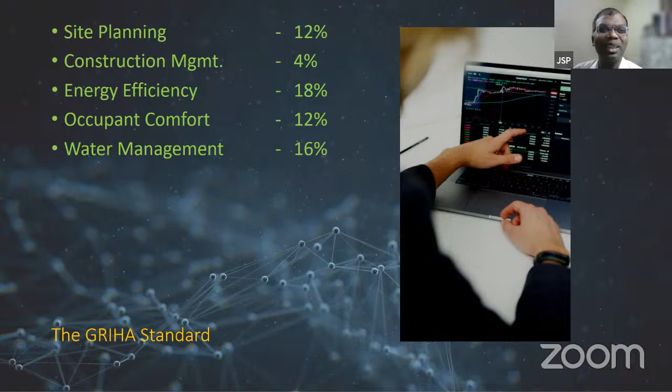If you are able to provide comfort to the end users, whoever is going to operate the building, and the stage people, it is going to be great. Occupant comfort has 12% weightage, and water management has 16%. Why we specifically want to talk about water and energy is because these are two things which will be continuously used in any building - for cleaning, drinking, sanitation and other human needs.

Water is very important. Energy is very important. Suppose we are able to handle water carefully, many of our problems are solved. So this is having a lot of marks. Then there is solid waste management, which has 6% weightage. The other important thing is sustainable building materials.

If you look at point number 2, construction management and sustainable building - the civil engineers have the control. If you are very good at these two, 16% of the marks are got. Energy efficiency is something where the problem in India is, when you look at an LED tube light, it is much costlier than the ordinary mercury tube, so we always go for the cheaper one initially.

If you look at the bulb - the Edison bulb or incandescent lamp - it is hardly 10 rupees, much cheaper than any other system. However, the energy efficiency is that much lower, but still people tend to move for the cheaper option because they see the initial cost. However, the true cost of the building is not at the initial stage, it is in the operation stage. Construction stage is 2 or 3 years maybe.

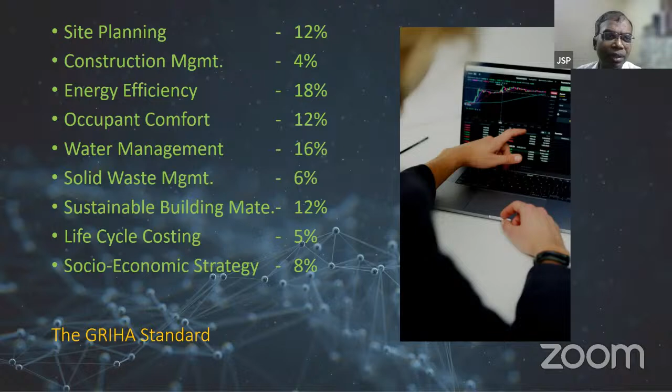One more thing is the social economic strategy being followed in the building. For example, labor force facilities - how are we making them feel good? What makes them work safely? What makes them work in comfort? For example, providing toilets, providing water - all of these are there in BOCW also.

So this is one of the ways by which students usually pass exams, and we always tell our students if you do this you'll at least pass the exam. If you want to get good grades, you study this extra. That's how we are trying to structure this.

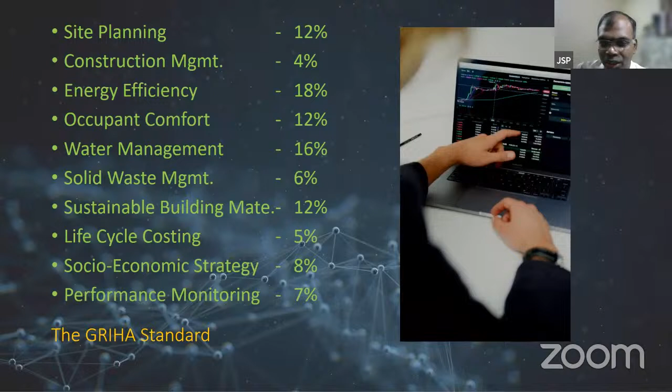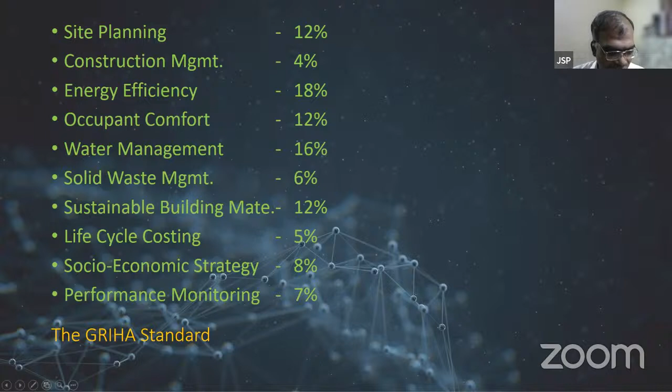I want to highlight that as civil engineers we have a very large role. About 25% of the aspects of sustainability are directly in the hands of civil engineers. I can go on about other things also, and this other 22% we talk about, water management and solid waste management, is also largely under the hands of civil engineers. So we need to look at this in depth: energy and water.

Moving on, the HVAC, heating, ventilation and air conditioning principles, is another very important thing. Whether HVAC is really required is a question we can ask ourselves. Suppose we can eliminate it, like ventilation involving fans.

For example, in my house, which is a rented house, I don't believe in investing too much in any house we go to. However, in the rooms we have more appliances and motors running, in bedrooms, because we spend a full 8 hours at night there, while the rest of the day most of the time we are not in the house. So I put BLDC fans in the bedrooms alone. Like this, even with a bit of selfish interest in cutting the bill, I want all of us to think on these lines.

When we are confident and we can tell that in our house or office we are doing this, we are sure to attract the interest of people buying the product from us. So probably we can say that with green principles, although the initial cost might seem a little high, it is going to be very beneficial for all.

And this is one of the things which all of us are very... I'm sorry, madam. Is there a question?

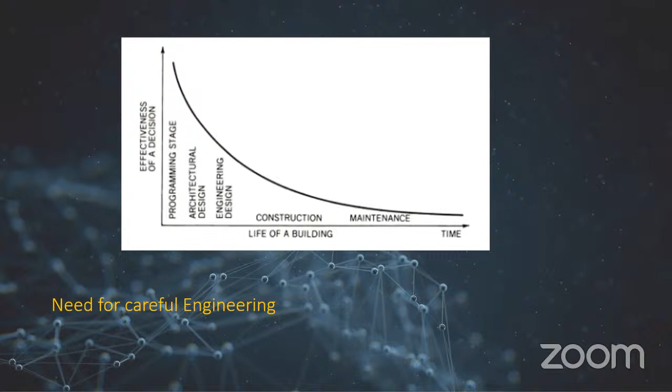Okay, coming back here, we have a graph which all of us are very familiar with. In the initial stages, if you want to make a change, it is very easy to make the change. It may not cost much, or it might cost a lot also, but to make the change is possible.

When the architectural decisions are made, for example the policy decision on how you are going to source electric power for the lifetime of the building, solar power, wind energy, because today windmills are not the traditional windmills alone. People now have different flower shaped vertical windmills which require very little space. In some countries, they use the electric poles to generate wind power. So this is the way technologies keep on evolving.

It's a very dynamic and fast moving world. Like that, we can make changes to any engineering design and other things. We can make a lot of changes. And again, it's an exponential curve.

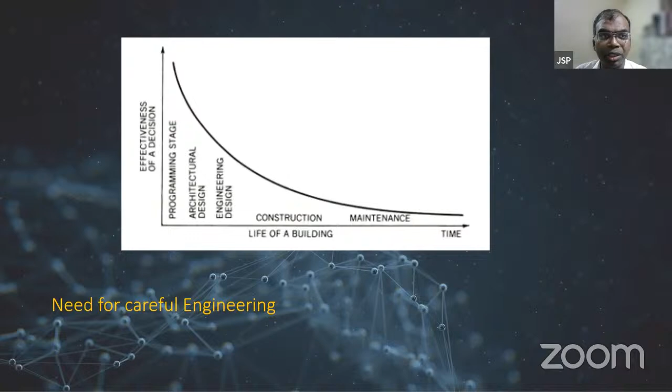So we are using a lot of alternate materials. All of us would have used it in some project or the other: AAC block, shale, the clay, hollow clay blocks, and so on and so forth. A lot of materials have come.

We are trying to reduce the use of carbon. For example, bricks need to be fired, so we try to avoid that, because it automatically gives us carbon credits. But more importantly, these alternate materials have inherent thermal properties. So what we're trying to put across here is, let us engineer our solution such that we can use a combination of materials as well as systems when we talk of energy.

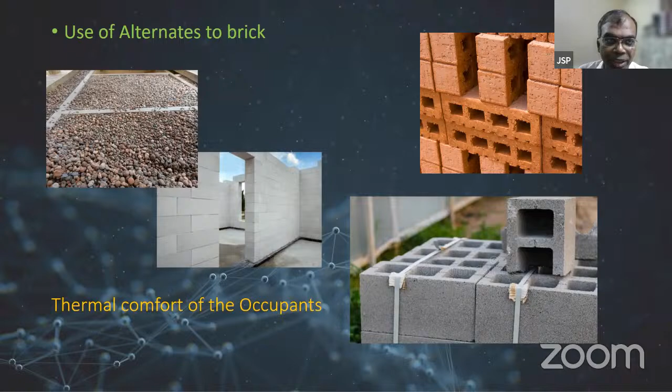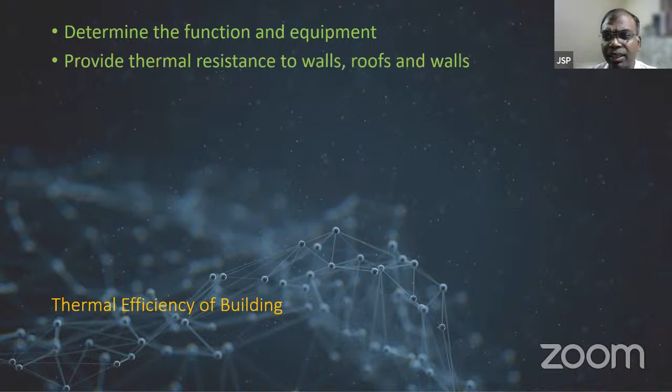Moving on to some general principles, just a reminder of what we can do. Suppose we have a room where a lot of heat is generated, like a switchgear room, what kind of ventilation could be done, and what advancements do we have today which we can probably use. Something we can look at is providing thermal resistance to walls.

Many of us use coatings on the ceiling or some kind of tiles to reduce the incidence of thermal radiation. So it's all engineering decisions which we can take. Also, buildings have certain reflectivity. So when we look at green buildings, they call it urban heat islands, and so many other names are there.

But what can be done to make it to our advantage? And also, it is not only my advantage, how it could affect another person is something which we can look at. And this is something probably a little personal.

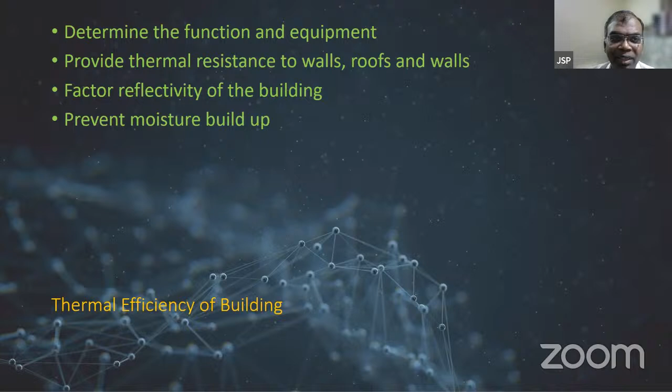Many times moisture buildup causes more damage. Sir was saying in the beginning, we want to see our buildings go on till our grandchild or any other person, and half of the problem is because of moisture movement. I'm not going to dwell too much on this.

Let us try to see, suppose we can weather seal operable windows, that is windows that open and close. If we are able to make it weather tight—especially from my experience in material handling systems, most of these areas are in very dusty areas—some of the windows are such that we'll not bother to close them again in the life of the building itself. So if we look at ways by which we can reduce the damage caused due to the building not being properly able to protect itself due to non-operational doors or windows, let us see how we can do it.

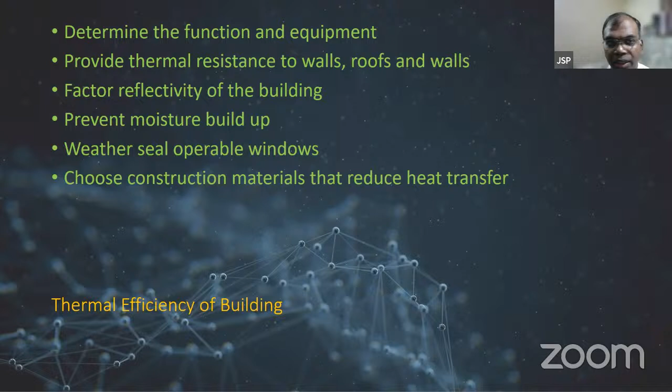We can always choose construction materials that reduce the heat transfer. These are again very known principles. We're just trying to recollect it.

When we talk of sustainability, we see that the building systems, it is the foundation. It is the main place where we can gain a real sustainable system. So maybe it may be making a structure slightly costlier by going for a different product, because one of the things you see is that the inertia which people have is very large. I'm sorry to put it like this, but I've seen many government contracts—it is very rigid because nobody wants to make a mistake.

But it's high time that we try to change our mindset so that we are more open to adopt established materials. AAC blocks are quite freely used, but there are still so many other locally available materials which we find it very difficult to push across.

For example, a recent thing we are doing is 5% replacement of cement with bagasse ash. This is from a sugar mill near Ranipet. We took the bagasse ash and conducted some experiments to see what would be the effect. 5% cement replacement is very small, but what we found is that there has been a good increase in the strength.

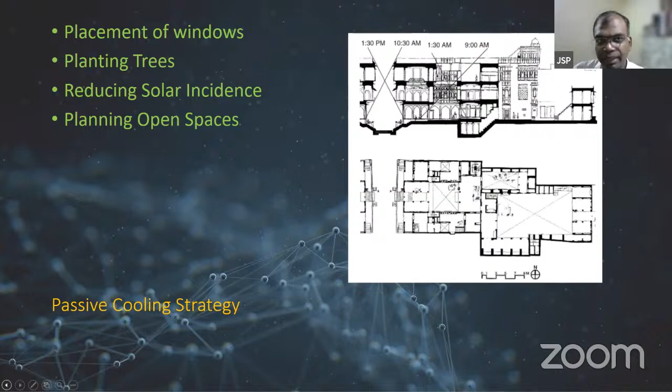The amount of light which enters into this room has been reduced during the day, along with the heat which is going to be brought in. The light solar radiation is going to be very, very high. And I cannot say that solar radiation is very bad. I have a short video to show this.

It's not a lamp and it's not a window. It's a completely new sort of product. This is essentially a sunshine distribution system where you put a mirror dish on the roof and use fiber optic cables to lead in sunshine into any dark rooms of your building. If you're on the ground, or deep within buildings, you can install a Solros system and get sunlight without the heat.

Most people prefer sunlight to artificial light. Sunlight prevents depression. Sunlight makes us feel better, makes us more productive. And yet 90% of our day is spent indoors in electric light. This electric light, or as we like to call it, fake light, makes up 20% of the global electricity consumption.

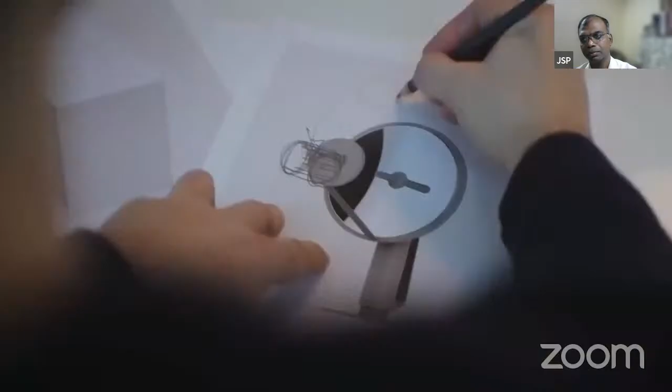The sunshine is a very natural product, so the experience should be physical without taking too much space. I'm working on designing the Solros system dish and the Solros box. I'm doing it in a very traditional Scandinavian way in order to fit most environments. We are aiming to sell internationally, so we have to think of many different home interiors. We also want to design a product which is affordable but has great quality and all details and finishes.

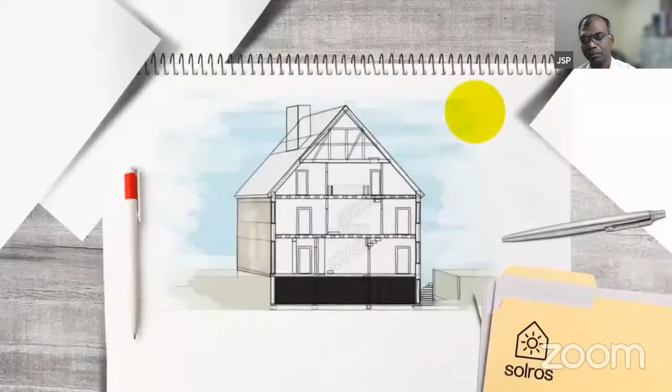The Solros system is really easy to install. All you have to do is mount the system where you have sun, put the cables inside the room where you have the light, and turn it on. Then it will automatically find the sun and you will get sunlight in your room.

Every day, the world is becoming more crowded. Look at the streets of dense cities where the sun is being blocked out by all the surrounding tall buildings. This is where Solros could make a real difference. By bringing real light to where the sun doesn't reach, Solros will make a lot of rooms better suited for both life and work. With Kickstarter, we can go global straight away. We want to be able to try it out everywhere around the world at the same time in order to make it an even better experience.

We have this fantastic source of light already, which is the sun. We just need to harvest it.

I'm just forwarding a little. Kaya first premiered on Indiegogo this past September. Using Kaya couldn't be easier.

Turn her on. She'll find the sun all on her own and redirect its light into your home or office. Kaya is solar powered, so you never have to worry if she's charged. She continuously monitors the movement of the sun throughout the day and remembers where you want to send the sunlight, so you have natural light indoors all day long. If you have a dark or gloomy room in your home or office, then Kaya is for you. With more than $500,000 raised to date on Indiegogo, it's been a truly life-changing experience to see the amount of support for Kaya around the world.